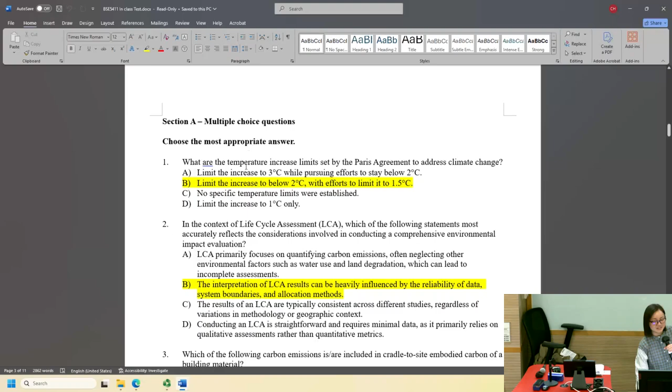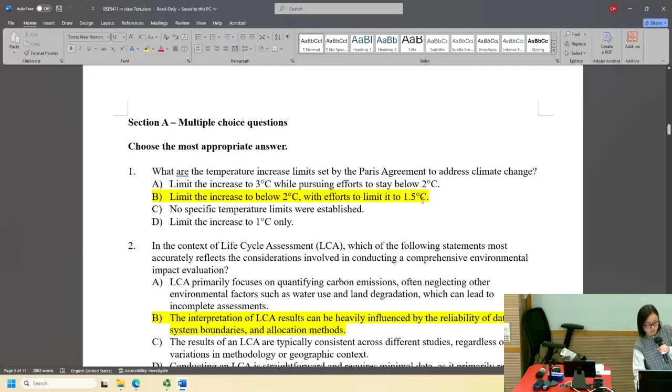Let's take a look at section A, the multiple choice. The first question, and you can see the yellow color is the answer. What are the temperature increase limits set by the Paris Agreement to address climate change? It should be below 2 degrees C. We target to limit the temperature rise by 2 degrees C and try our best to limit to 1.5 degrees C. Okay, then question number 2, in the context of life cycle assessment, which of the following statements most accurately reflects the considerations involved in conducting a comprehensive environmental impact evaluation?

So here is about life cycle assessment. For answer A, life cycle assessment primarily focuses on quantifying carbon emissions, often neglecting other environmental factors - which is not true. Life cycle assessment can be used for many different kinds of assessment. Carbon assessment, or assessing the impact of climate change, is only one of the applications. You can use life cycle assessment for assessing ozone depletion, air pollution, or toxicity in the soil or water, and so on. So A is not correct.

And then B: the interpretation of LCA results can be heavily influenced by the reliability of data, system boundary, and allocation method - this is true. The absolute results of LCA may very often not be too meaningful. LCA is usually for comparing results. You use the same method, the same set of data for measuring or assessing the life cycle value among different alternatives, and then you make a comparison. The absolute value could have a high level of error.

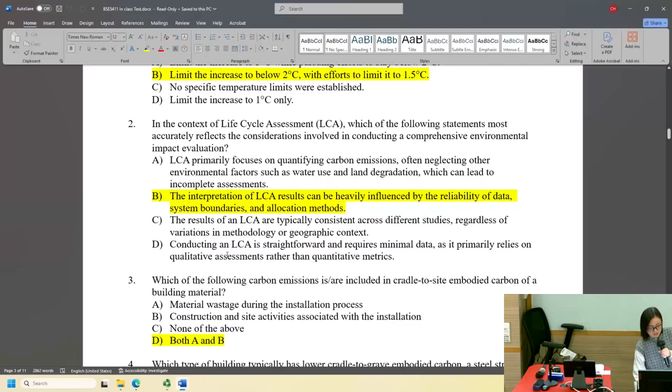And then: the results of LCA are typically consistent across different studies - not true. It's very difficult to have a consistent study because there are just too many variables, too many data that you need to collect. Conducting an LCA is straightforward and requires minimal data - no, it requires a lot of data.

And then number 3: which of the following carbon emissions is or are included in cradle-to-site embodied carbon of a building material? We have different boundaries for quantifying embodied carbon, like cradle-to-gate - to the manufacturing factory - cradle-to-site - construction site - and also cradle-to-grave.

Okay, so here it is considering cradle to site. That is from extracting the material and then transporting it to manufacturing factories, then manufacturing, then transporting it into a distribution site, and then transporting it into the construction site. It should also include the emissions due to material wastage. Like in the lessons, we tried to calculate embodied carbon and included a wastage factor, because for cradle to site embodied carbon, we include the amount of emissions due to material wasted. The construction and site activities associated with installation are also included in cradle to site embodied carbon, but not cradle to gate.

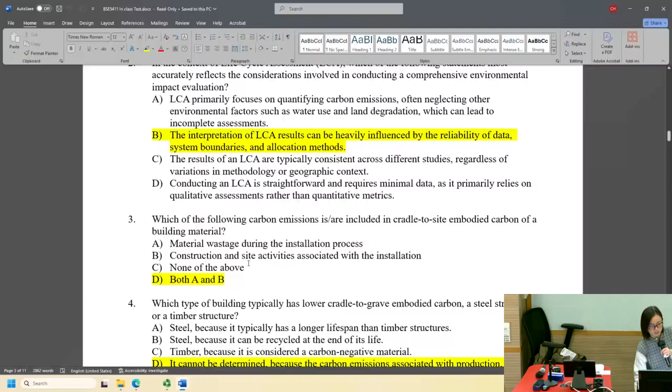For cradle to gate, it's only from cradle to the distributor of that material, not including transportation from the retailer or distributor to the construction site, and not including material wastage or construction and site activities inside the construction site. But this is cradle to site, so we will include these also. So the answer will be both A and B.

And then question number 4: which type of building typically has a lower cradle to grave embodied carbon? Cradle to grave would be the whole life cycle, so whether a steel structure or a timber structure has lower embodied carbon is very difficult to tell. The answer should be D, it cannot be determined, because the carbon emissions associated with production, transportation, and end of life differ significantly and can vary based on numerous factors. Just from the material, whether you use steel or timber, is too little data to determine which structure will have a lower cradle to grave embodied carbon.

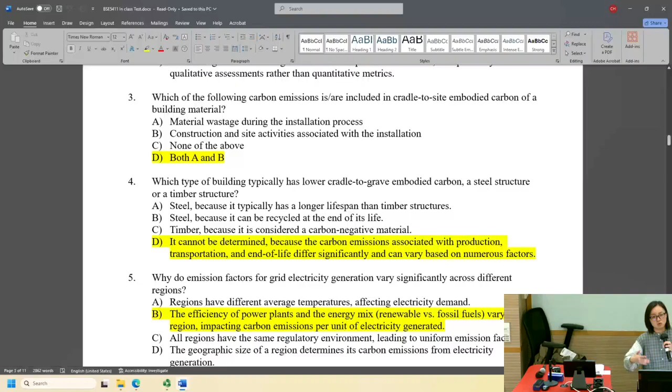How you dispose of the steel, whether you recycle it or throw it away, and the timber, whether you burn it or throw it to the landfill, or whether you reuse it, will affect the cradle to grave embodied carbon very much. For cradle to gate, maybe you can determine it, because we have some reliable data comparing the same mass of steel and the same mass of timber. We have some idea that probably steel will have a higher cradle to gate embodied carbon, but for cradle to grave, there will be lots of variables.

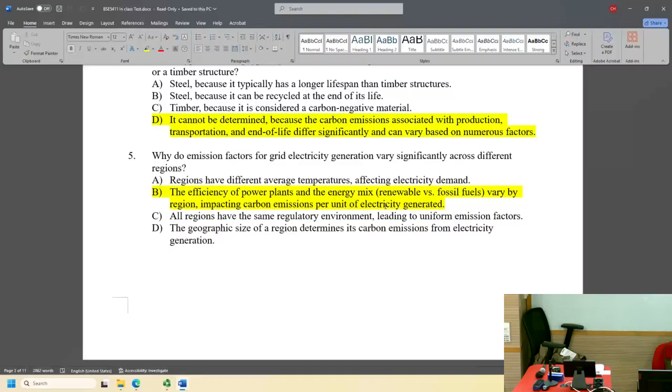Number 5: why do emission factors for grid electricity generation vary significantly across different regions? Not necessarily different regions - just in Hong Kong, the emission factors for CLP and HEC already vary a lot. It's because the efficiency of different power plants and the energy mix vary by region. Maybe some power plants use more coal, and some use more oil. For the power plant using coal, the emission factor will be higher, because burning coal emits more carbon dioxide. Or for some power plants, they may use renewable energy, maybe using PV panels, wind turbines, hydropower, then the emission factor would definitely be lower, impacting the carbon emissions per unit of electricity generated.

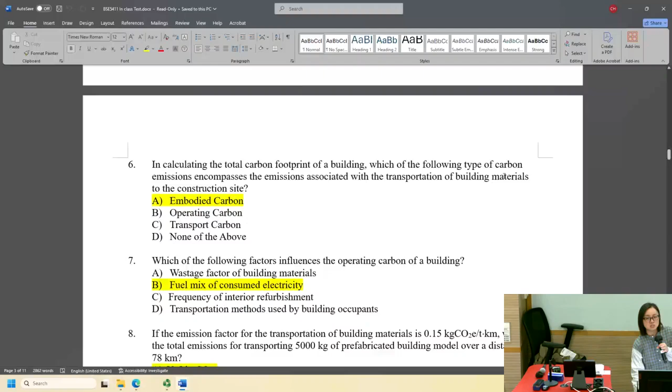Number 6: in calculating the total carbon footprint of a building, which type of carbon emissions encompass the emissions associated with the transportation of building materials to the construction site? This is the transportation of building materials, not the occupants, so it will not be transport carbon. Transport carbon would be the carbon emissions due to the transportation and day-to-day travel by the occupants. But here is about building materials, so it should be included in the embodied carbon.

Number 7: which of the following factors influence the operating carbon of a building? The operating carbon would be the carbon emissions due to day-to-day operation, like the building services system, due to the consumption of electricity by the air conditioning system, the lighting, the electrical appliances, and so on. These are all related to electricity consumption, and therefore the fuel mix of the consumed electricity will definitely affect the operating carbon. The fuel mix would be whether the power generating company burns oil, coal, or natural gas, or whether it utilizes renewable energy - these are the fuel mix of the electricity generation.

Number 8: if the emission factor for transportation of building materials is 0.15 kg carbon dioxide equivalent per ton per km, this emission factor depends on how heavy the material is and the transportation distance. So we multiply the weight of the material by the distance: 0.15 multiply 5,000, multiply 78. But be careful, the unit is per ton, and here the weight is in kg, so you need to divide by 1,000 to convert kg into ton. So the answer should be A.

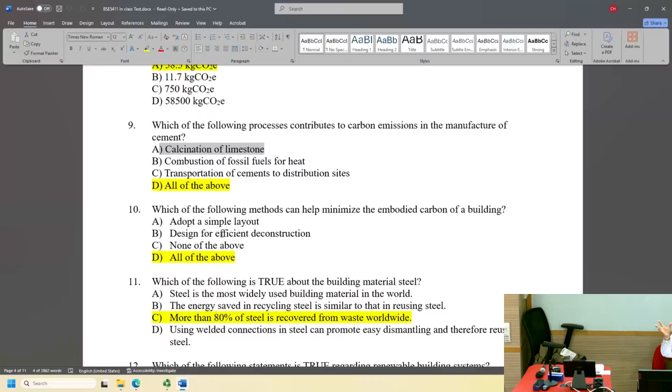Adopting a simple layout can lead to reduction of building material, and designing for efficient deconstruction means that when you deconstruct the building, you can collect all the materials for other uses. So the answer should be all of the above.

Number 11: which of the following is true about the building material steel? For A, steel is the most widely used building material in the world - this is not true. Concrete is the most widely used building material, not steel.

For B, the energy saved in recycling steel is similar to that in reusing steel - this is not true. Reusing steel saves much more energy than recycling. Recycling means melting the steel and casting new steel, which uses a lot of energy.

But reusing is without melting down the steel, so you save a lot of energy. For C, more than 80% of steel is recovered from waste worldwide - this is true, because steel is a very expensive material, so we recover as much as we can.

Using welded connection in steel can promote easy dismantling and therefore reuse of the steel - this is not true. It should be nuts and bolts, not welded connections, so that you can dismantle the steel and use it elsewhere.

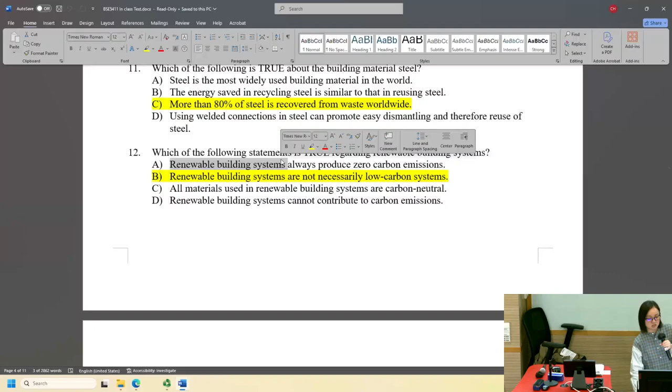Number 12: which of the following statements is true regarding renewable building systems? A, they always produce zero carbon emissions - this is not true. Renewable sources like biomass are renewable, but burning biomass generates a lot of carbon. So renewable building systems are not necessarily low carbon systems - this is true. The answer should be B.

All materials used in renewable building systems are carbon neutral - no, just like biomass. And renewable building systems cannot contribute to carbon emissions - not true. So the answer is B.

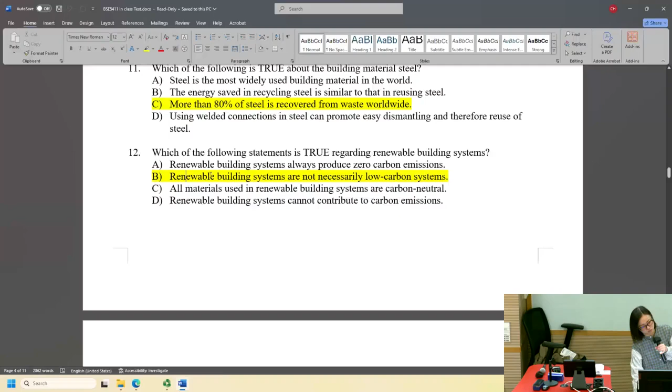Number 13: in a carbon abatement curve, the MACC, or marginal abatement cost curve, various emissions reduction projects are ranked from the most cost-effective on the left to the least cost-effective on the right. Each block represents one decarbonization solution. So which of the following statements is true?

A, the width of a block represents the annual carbon abated for the emissions reduction project - this is true, maybe measured in tons of carbon dioxide equivalent.

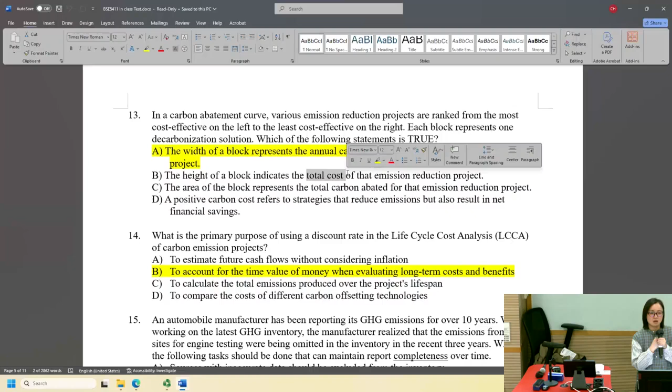For B, the height of a block indicates the total cost of that emissions reduction project - not total cost, but the cost of emissions reduction per each unit of carbon abated, maybe in US dollars per ton of carbon equivalent, or Hong Kong dollars per kg of carbon equivalent abated.

And C, the area of the block represents the total carbon abated for that emissions reduction project - not the total carbon abated, but the total cost of that project. The y-axis is the cost per unit of carbon abated, and the x-axis is the annual carbon abated, so x-axis multiplied by y-axis gives the total cost for annual carbon abatement.

A positive carbon cost refers to strategies that reduce emissions but also result in net financial saving - it should be negative. A negative carbon cost, when you refer to the MACC curve, the bars with negative y-axis would be the strategies that result in financial saving.

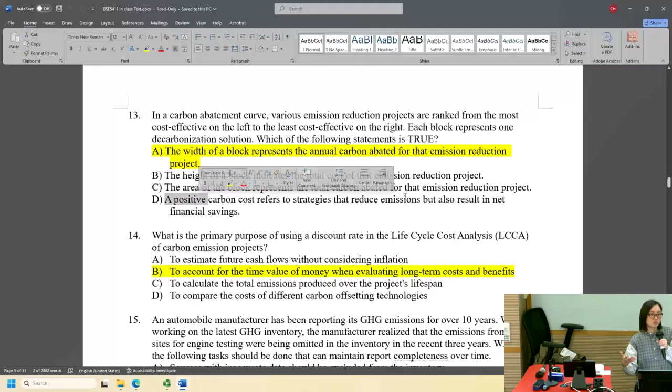Okay, number 14, what is the primary purpose of using a discount rate in the life cycle cost analysis of a carbon emissions project? So the discount rate is used for many applications, usually in life cycle cost analysis, not necessarily carbon emissions - maybe for studying different building design alternatives. So what is the purpose of using discount rate?

It should be B, to account for the time value of money when evaluating long-term costs and benefits. For A, to estimate future cash flows without considering inflation - we can include inflation in the discount rate. If we include inflation, we may also include the escalation price of a product, so that would be a real discount rate. So a discount rate can include or consider inflation or escalation of price.

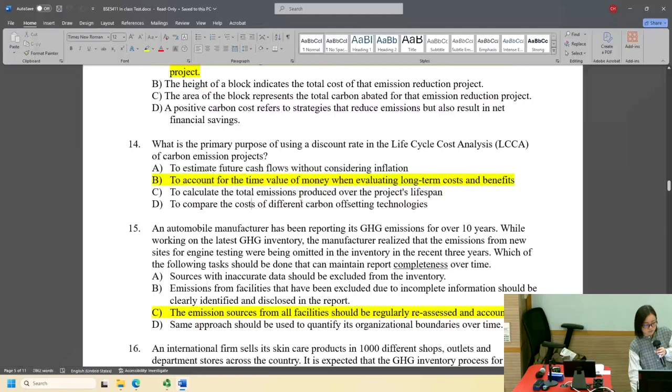For C, to calculate the total emissions produced over project lifespan - this is irrelevant, not related to discount rate. And to compare costs of different carbon offsetting technologies is also irrelevant to discount rate. So B would be the best answer.

Number 15, an automobile manufacturer has been reporting its greenhouse gas emissions for over 10 years. While working on the latest greenhouse gas inventory, the manufacturer realized the emissions from a new site for engine testing were being omitted in the inventory in the recent 3 years. Which of the following tasks should be done that can maintain report completeness over time? So the keyword would be completeness.

When we do the carbon footprint assessment, there are 5 essential considerations, and completeness is one of them. So here, A, B, C, D, which one is about completeness?

For A, sources with inaccurate data should be excluded from the inventory - this is true, but it is not about completeness, this is about accuracy. For B, emissions from facilities that have been excluded due to incomplete information should be clearly identified and disclosed in the report - this is also true, but not about completeness, this is about transparency.

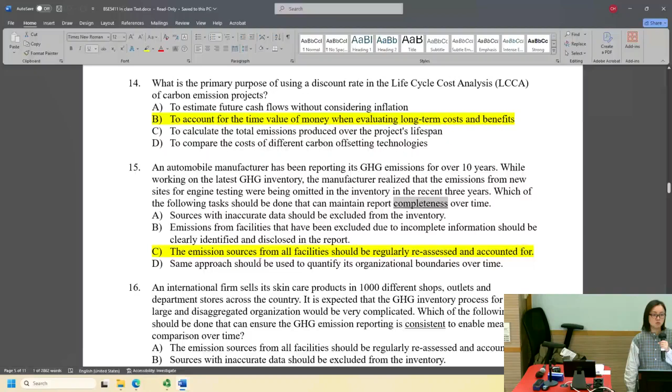Number 16, similar question. An international firm sells its skincare products in 1,000 different shops, outlets, and department stores across the country. It is expected that the greenhouse gas inventory process for this large and disaggregated organization would be very complicated. Which of the following tasks should be done that can ensure the greenhouse gas emissions reporting is consistent to enable meaningful comparison over time? So once again, the keyword is consistent.

So A, B, C, D, which of these is about consistency? For A, the emission sources from all facilities should be regularly reassessed and accounted for - this is completeness, whether we have included all the facilities. For B, sources with inaccurate data should be excluded from the inventory - this is about accuracy. And emissions from facilities that have been excluded due to incomplete information should be clearly identified and disclosed - this is about transparency.

For D, the same approach should be used to quantify its organizational boundaries over time - then this is about consistency. Same approach used over years, then you can compare the emissions year over year.

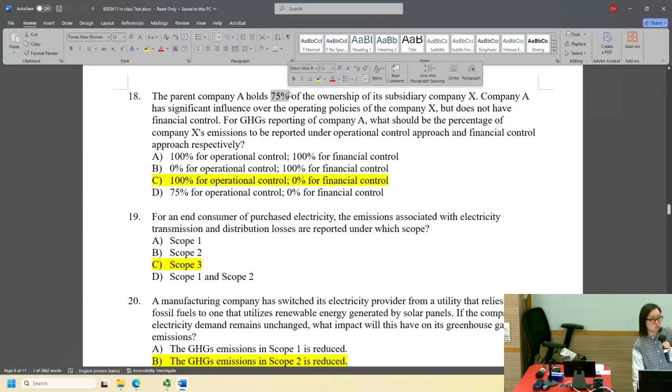Number 19, for an end consumer of purchased electricity, the emissions associated with electricity transmission and distribution losses are reported under which scope? For example, when I go home I turn on the lighting and the television, so I need to pay for the electricity - I am the end consumer. When the electricity is transmitted over the cables, there is some transmission loss, which indirectly contributes to carbon dioxide emissions. These are counted under scope 3 - not scope 1, because there's no direct emission within my home, and not scope 2, because I didn't buy that transmission loss. So it would be scope 3.

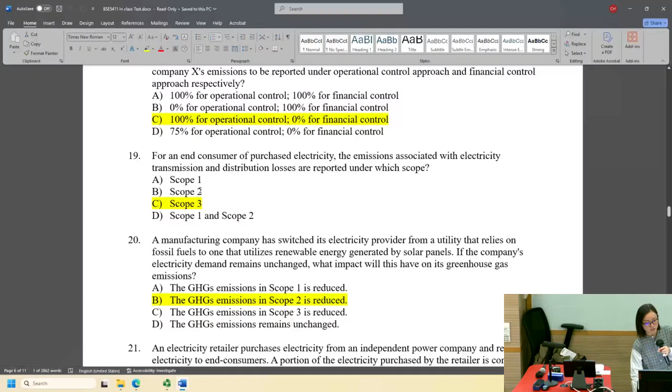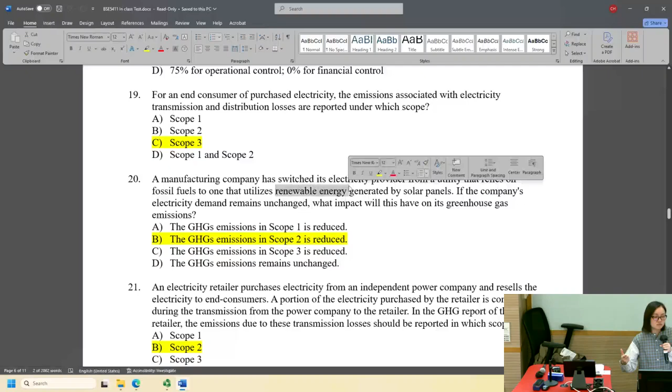Number 20, similar question but different. A manufacturing company has switched its electricity provider from a utility that relies on fossil fuels to one that utilizes renewable energy generated by solar panels. If the company's electricity demand remains unchanged - same electricity consumption - what impact will this have on its greenhouse gas emissions? It would be reduced in scope 2. Scope 1 is irrelevant here because it's about electricity consumption, not burning of fuel. For electricity consumption, it's always about scope 2 - you are importing electricity. So although electricity consumption remains unchanged, the emission factor will be smaller because that utility provider uses renewable energy.

Number 21 is similar to number 19, also about transmission loss. An electricity retailer purchases electricity from an independent power company and resells it to end consumers. A portion of the electricity purchased by the retailer is consumed during transmission from the power company to the retailer. In the greenhouse gas report of the retailer, the emissions due to these transmission losses should be reported in which scope? This one is a bit tricky - the keyword is 'purchased'. Since the electricity was purchased by the retailer and consumed during transmission loss, these emissions are due to the purchase of electricity by the retailer, so it would be scope 2.

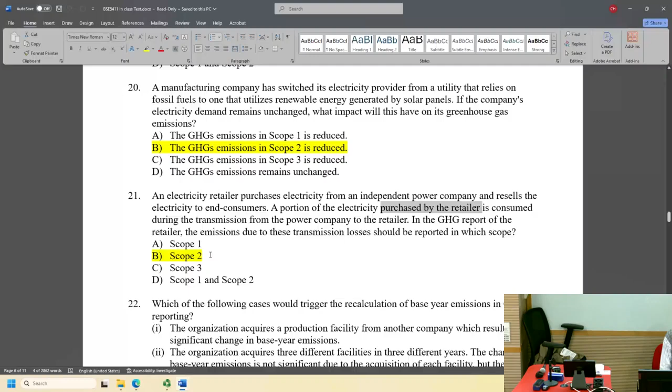Number 22, which of the following cases would trigger recalculation of base year emissions in greenhouse gas reporting? Number 1: the organization acquires a production facility from another company which results in significant change in base year emissions. Since it's an acquisition with significant change, yes, it will trigger base year recalculation.

Number 2: the organization acquires 3 different facilities in different years, and the change in base year emissions from each is not significant, but the cumulative change is significant. Then it will also trigger the recalculation.

Number 3: the organization opens new production facilities for more effective manufacturing process which results in significant increase in emissions. This is not acquisition, not divestment, not merging of business - it's only normal operation of the business. So it will not trigger base year recalculation.

Number 4: a significant calculation error is found in the quantification of greenhouse gas emissions by one of the facilities. When a significant error has been found, the base year emissions should also be recalculated, and these recalculations should also be reported, for transparency, to advise the stakeholders.

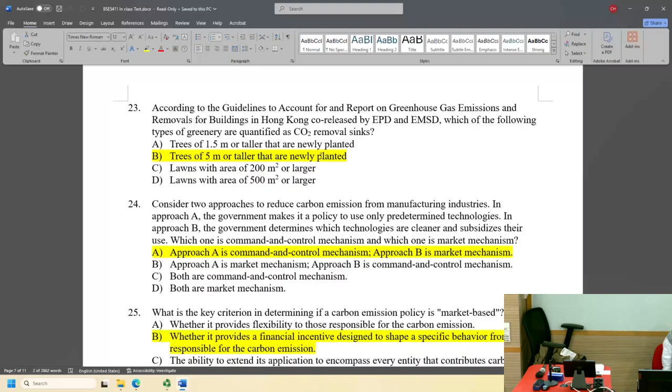Number 23, according to the guidelines to account for and report on greenhouse gas emissions and removals for buildings in Hong Kong, co-released by the EPD and EMSD, which types of greenery are quantified as carbon dioxide removal sink? Only trees which are tall enough - taller than 5 meters - and newly planted will be included and treated as a carbon dioxide sink. If the trees are not tall enough or not newly planted, they are not counted.

Number 24, consider 2 approaches to reduce carbon emissions from the manufacturing industry. In approach A, the government makes it a policy to use only the predetermined technology.

So it is a regulation. Everyone should use a particular technology. And then in approach B, the government determines which technologies are cleaner and subsidizes their use. So maybe you have a list of technologies available to the business, and if you choose to use these technologies, then you can get some subsidies from the government.

Then for approach A, it would be command and control. For command and control, it is mandatory, and the government will specify the limit of reduction, or rather the minimum amount of reduction required for using certain kinds of technologies. So no flexibility, and very often for command and control, there is no financial incentive.

But for approach B, it is a market mechanism or market-based mechanism. So you have flexibility. The company has the flexibility to choose which technology to use, and they can also gain financial benefits, financial incentives.

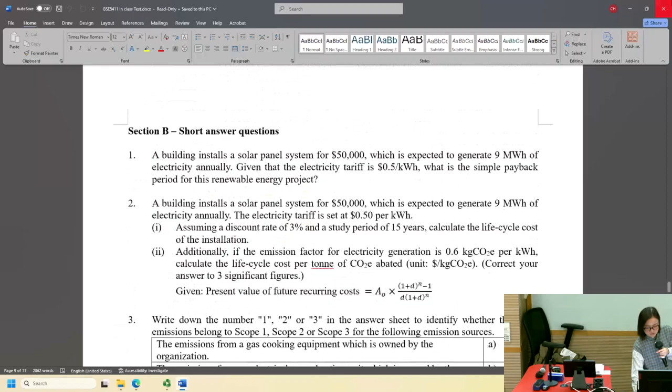Okay, and then for the short answer questions, maybe we can put them alongside each other.

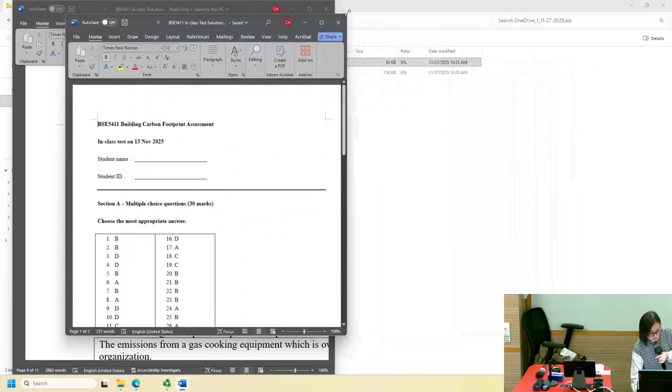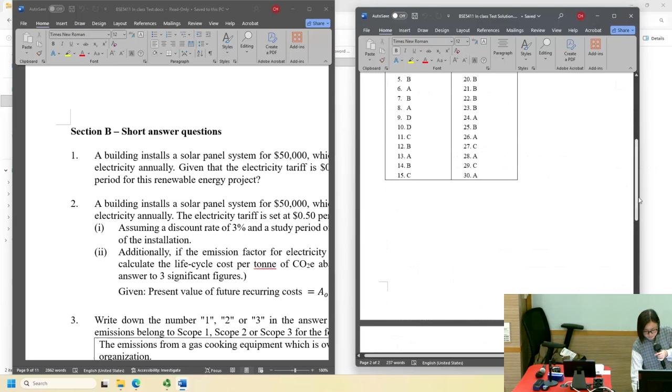Okay, question number 1. I think question number 1 is easy, and most of you get the right answer.

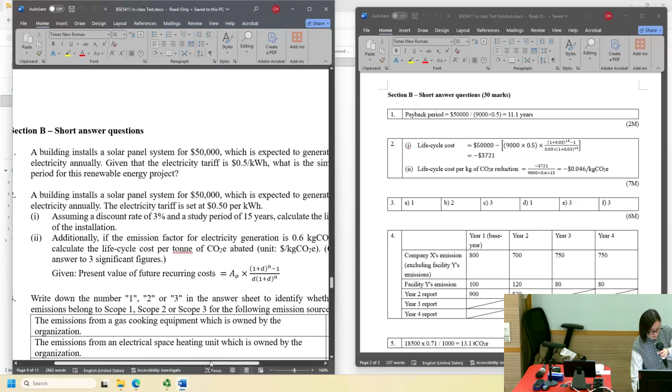A building installs a solar panel system for $50,000. This is the installation cost, the initial cost, which is expected to generate 9 megawatt hours of electricity annually. Given the electricity tariff is $0.5 for every kilowatt hour, what is the simple payback period?

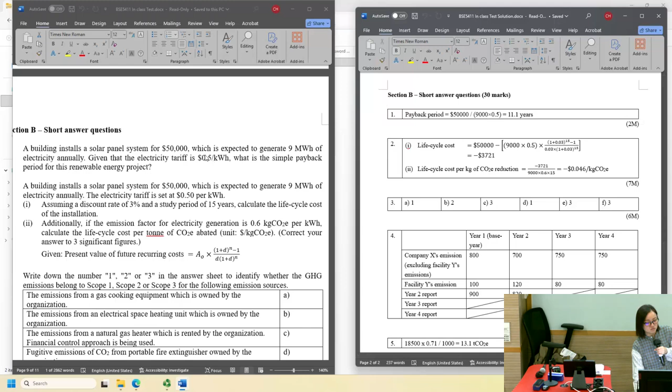The simple payback period would be the initial installation cost divided by the annual saving. So the initial cost is 50,000, and 9 megawatt hours would be 9,000 kilowatt hours. You need to understand the unit - mega would be 10 to the power 6. So divided by 9,000 and then the unit rate of electricity, the payback period is 11.1 years.

Number 2, a building installs a solar panel for the same amount of money, 50,000, which is expected to generate the same amount of electricity, 9 megawatt hours annually, and the tariff is the same rate.

Number 1, assuming a discount rate of 3% - this is D, the discount rate - and a study period of 15 years, we assume that this solar panel system can operate for 15 years. So you only need to pay in the beginning of the project.

And then every year you will save this amount of money. For number one, part one, calculate the life cycle cost of the installation. The life cycle cost will include the installation cost in the beginning of the project, and also any money saving in the coming 15 years.

So 9,000 multiplied by $0.5 - this is the energy fees, the electricity fees saving every year in the coming 15 years. These are future amounts of money, and you have to convert the future money into the present value.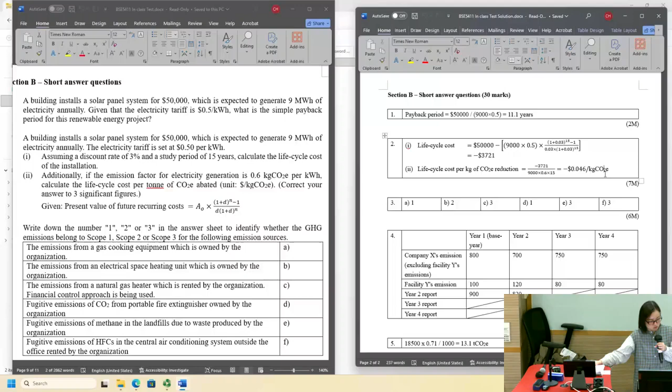Okay, next, question number 3. Here we have to determine whether the greenhouse gas emissions will be counted under Scope 1, Scope 2, or Scope 3. So let's take a look at A.

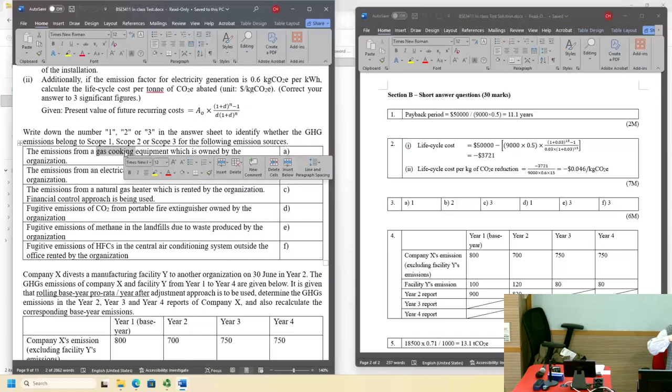The emissions from a gas cooking equipment which is owned by the organization. So the organization owns that equipment, so it means that it would be within the operational boundary. And it is a gas cooking equipment, so it will generate direct emissions. When you burn the natural gas, you emit carbon dioxide directly within the boundary. Then it would be Scope 1.

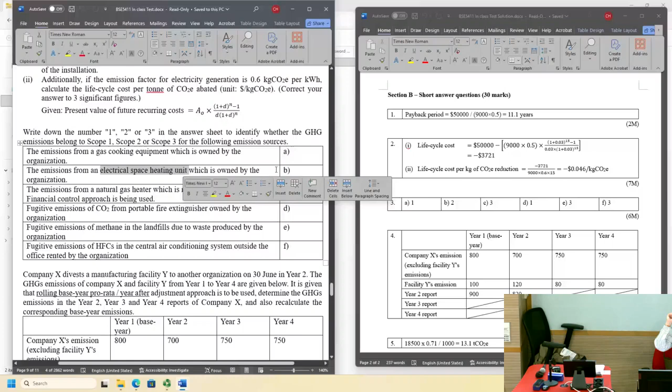B, the emissions from an electrical space heating unit which is owned by the organization. Just like A, this unit is owned by the organization, so within the boundary. But this is an electrical space heating unit, so it consumes electricity. Then the emissions would be indirect emissions due to the import or purchase of electricity. Then it would be Scope 2.

And C, the emissions from a natural gas heater which is rented by the organization and financial control approach is being used. For financial controlled approach, it means the organization can have some financial benefits from that facility. But for this company, it has no financial benefits. The organization rented the heater, so there is no financial gain through the use of this heater. And the emissions due to this gas heater, although it is a direct emission within the site, carbon dioxide and other greenhouse gases will be emitted, it is not within the boundary, because this heater is rented and financial approach is being used, so it is out of the boundary. Then the emissions will be under Scope 3.

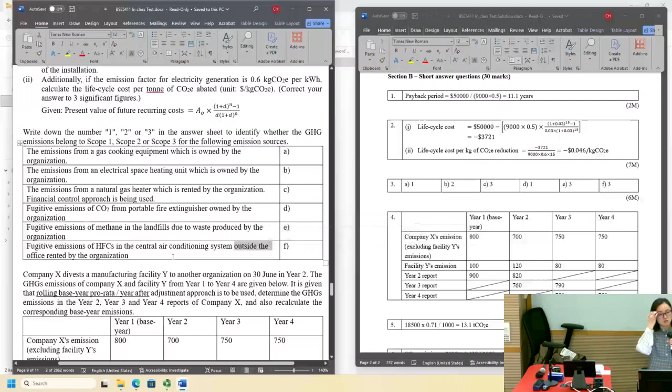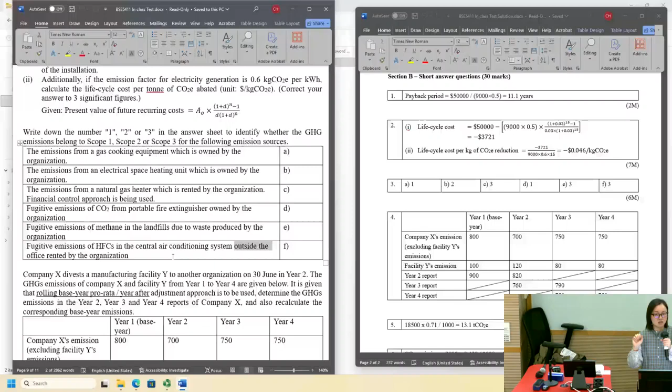And the last one, fugitive emissions of HFC in the central air conditioning system outside the office rented by the organization. So for this part of the air conditioning system, it is outside the boundary. The organization has no control over the central air conditioning system, so it is out of the boundary of this organization. So although once again it is direct emissions, it is outside the boundary. Therefore, also Scope 3.

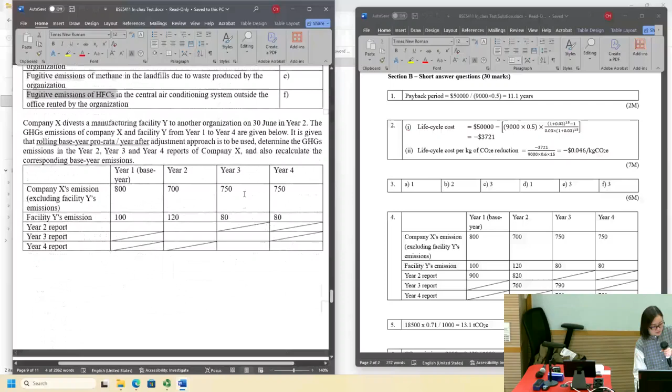Okay, next is about the base year emissions recalculation. Company X divests a manufacturing facility. It's about divestment, not acquisition. X divests manufacturing facility Y to another organization in the middle of the year. The greenhouse gas emissions of X and Y from year 1 to year 4 are given. It is given that rolling base year, pro rata, year after adjustment would be used. Determine the greenhouse gas emissions in year 1, 2, 3, 4.

So, first of all, you have to understand that X divests manufacturing facility Y. So X is divesting Y, it means Y will not belong to X anymore. And it happened in the middle of the year. And we are using rolling base year, so you don't need to write down anything because the base year will be updated every year. And using pro rata, if it happened in the middle of the year, then half of the emissions.

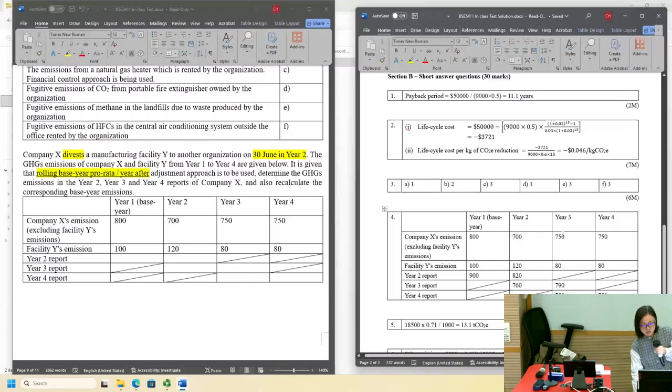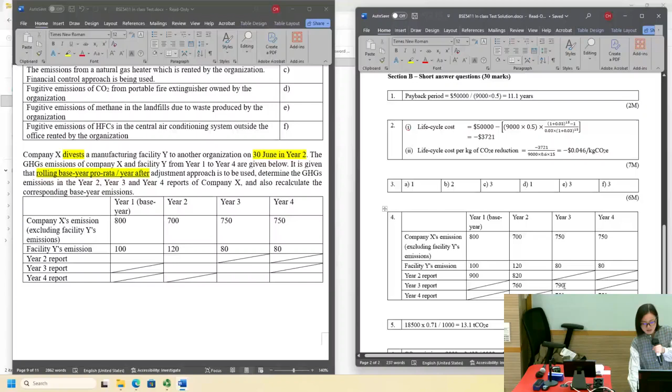And then for year 3, we are using the same pro rata, also half, so it would be 750, plus half of the emission, so 790.

And for the year 4 report, the divestment has already completed, even for the base year. The base year is now updated to year 3, and the divestment has completed. For year 4, the divestment has also completed, so it has only the emissions from company X, while from facility Y it would be just 0%. So it would be 750 and 750.

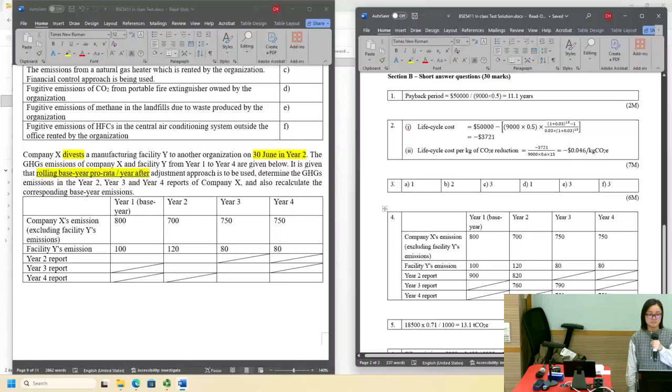Number 5: calculate the greenhouse gas emissions in tons of carbon dioxide equivalent from purchased electricity of 18,500 kilowatt hours from Hong Kong Electric, and the emission factor can be found in the last page.

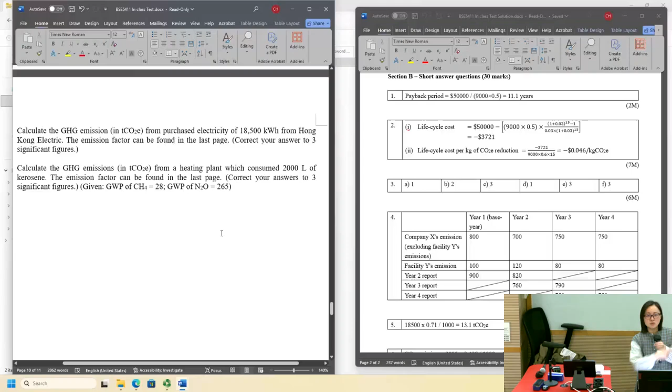So this one is easy. I think almost all of you got the right answer. So from the HKEX, we refer to this table, and the emission factor is 0.71 kg per kilowatt hour.

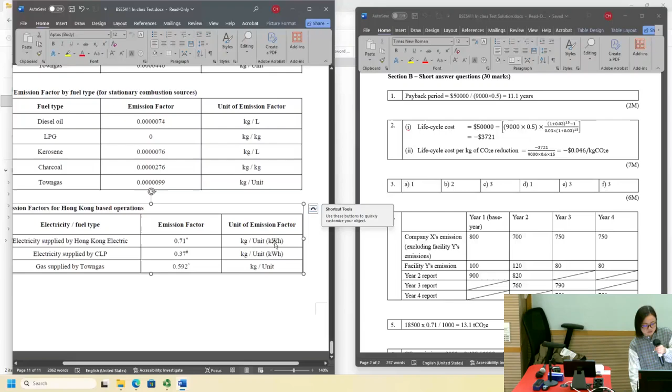But be careful, the question asks you to give tons of carbon dioxide equivalent. So the calculation would be the amount of energy consumption multiplied by the emission factor, and you have to divide it by 1,000, to convert the unit kg into ton of carbon dioxide equivalent.

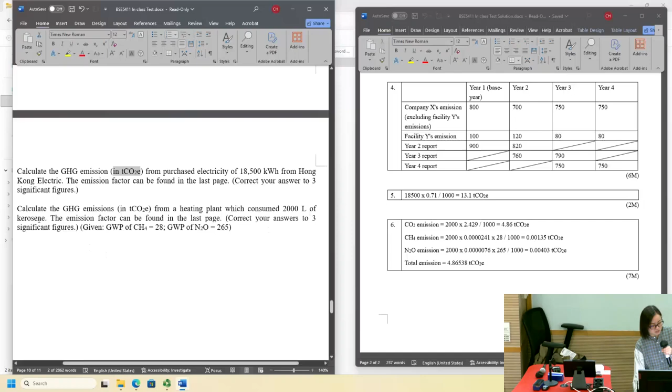And then the last question: calculate the greenhouse gas emissions in tons of carbon dioxide equivalent, again from a heating plant which consumed 2,000 liters of kerosene. The emission factor can be found in the last page, and you are also given the global warming potential.

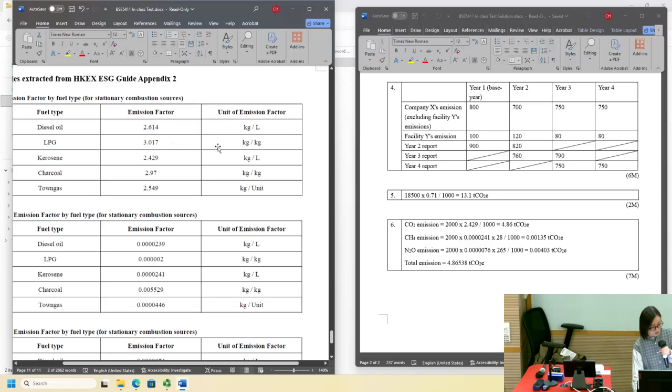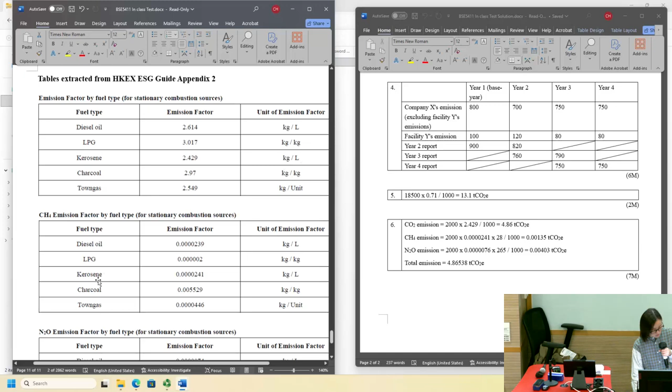So for kerosene, it will cause carbon dioxide emission. This one is for carbon dioxide, then methane, then nitrous oxide. So you have kerosene 2.429 kg per liter, and then for methane this unit, and for nitrous oxide this value.

So you have carbon dioxide emissions, and for carbon dioxide the global warming potential would be 1. For methane, the global warming potential is 28. For nitrous oxide, 265. And all these need to be divided by 1,000 to convert the unit from kg to ton. So adding all these would be the total emissions from the consumption of 2,000 liters of kerosene.

Any questions about the test?

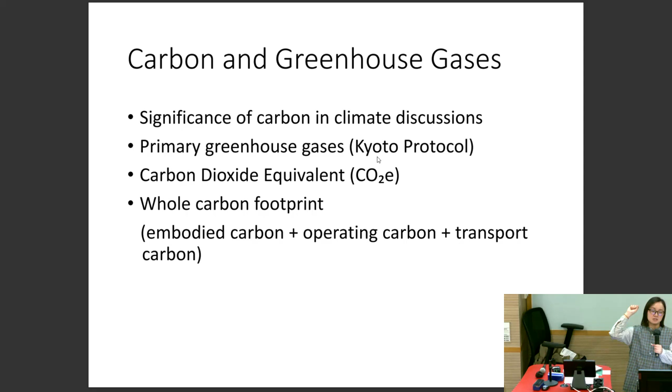These are some of the most important content that you need to study. First, about carbon and greenhouse gases: the significance of carbon in climate discussion, why we use the term carbon all the time, and what are the primary greenhouse gases as defined by the Kyoto Protocol. You also need to understand the concept of carbon dioxide equivalent, and the concept of whole carbon footprint, which includes embodied carbon, operating carbon, and transport carbon. Then the carbon emissions in buildings, the emission sources - in a building you have so many different kinds of emission sources contributing to embodied carbon, operating carbon, or transport carbon. Have some background, and the contribution of buildings to global greenhouse gas emissions - the materials, electricity consumption, and so on.

Effects of carbon policy on the construction industry. These carbon policies could be carbon tax, or energy efficiency regulations, maybe more and more stringent. For carbon tax, it means carbon intensive materials will be more and more expensive. And if you utilize energy generated by burning fossil fuel, also more expensive. The government may also enforce the use of some carbon emission reduction technologies. So what are the effects of these carbon policies on the construction industry?

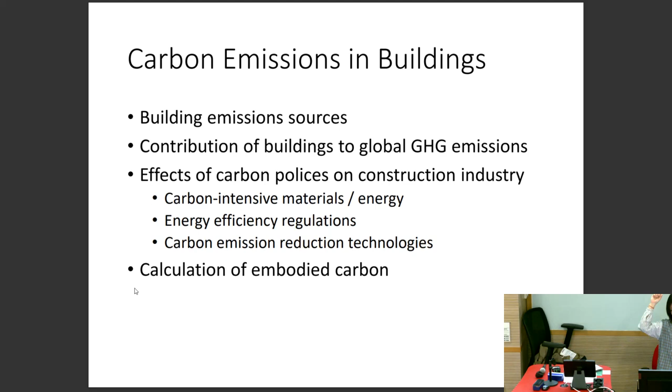You also need to know how to calculate the embodied carbon. I think you can refer to the PowerPoint slides and also some tutorial exercises - we have some calculations about embodied carbon.

And the economic aspect of carbon reduction. You should know how to calculate the simple payback period, just like what we have done for the test. And the life cycle cost analysis, once again just like what you have done for the test. And the carbon abatement potential - the cost per kg or per ton of carbon dioxide equivalent, the amount of carbon abated. You also need to know how to draw the marginal abatement cost curve, and the definition of some of the components - the x-axis, the y-axis, the structure of the curve, the components of the curve, and how to analyze the cost curve.

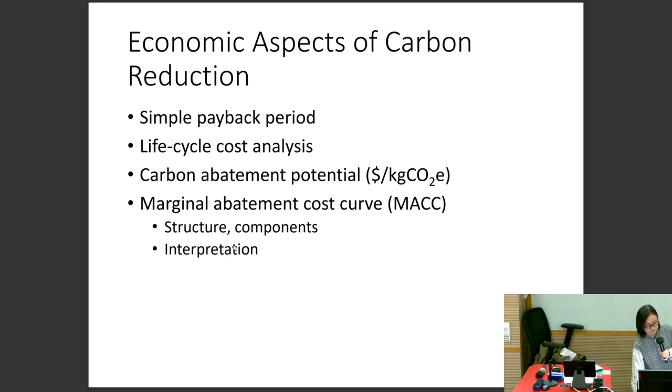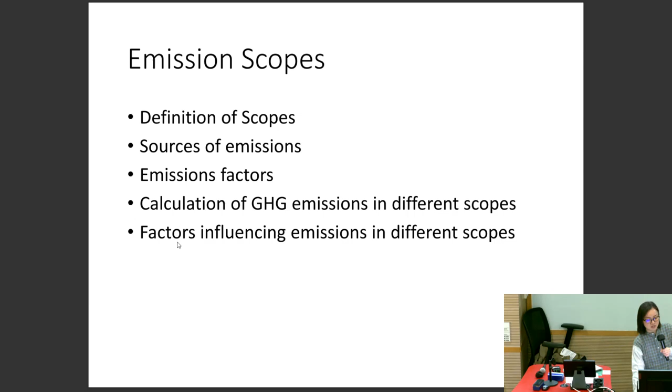Next would be the emission scopes - the definition of scope 1, scope 2, scope 3 emissions, and for each scope what are the sources of emissions, and how to apply the emission factors. There are different emission factors, some for electricity consumption, some for burning certain kinds of fuel like kerosene in the test. You need to know how to apply those emission factors, and calculations of greenhouse gas emissions in different scopes - scope 1, scope 2, scope 3 - and what factors will influence the emissions in each scope.

Regulatory mechanisms - there are different types, command and control, and market-based mechanisms. For command and control, what is the definition, what is the meaning of this mechanism, what are their characteristics, some drawbacks or strengths, advantages, limitations of this regulatory approach. And for the market-based mechanism, same - what is the definition, what are the characteristics and features. For market-based, you can provide economic incentives.

Finally, do some cost calculation with or without the emission trading scheme, just like in the tutorial exercise - calculating the amount of economic saving when you have the emission trading scheme, how much money can be saved by trading the credits in the market.

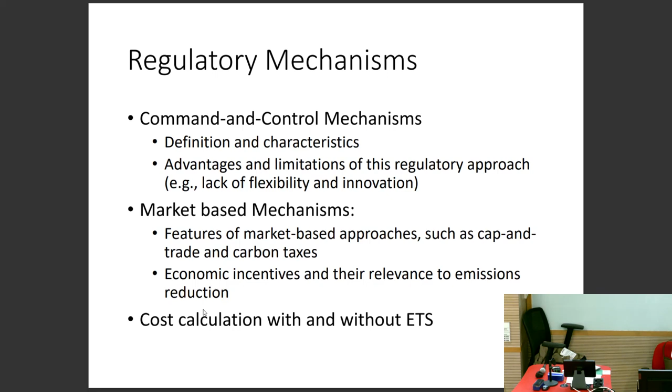And that's it. So I think you should have enough material and information for the preparation of the examination. These are the key PowerPoints, so when you don't have enough time, you may study these. But I hope that you will have time to study all the slides.